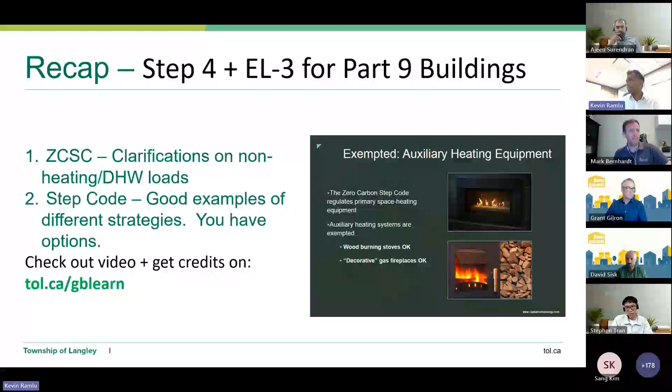So if this is something you really want to have, and your primary heating system can meet the demand, fill your boots, it's not included. It is not prohibited to have a fireplace. Cooking also - if you have a gas range and you're following the performance path of the Zero Carbon Step Code, go nuts, it's not included. It has nothing to do with Zero Carbon Step Code compliance, and barbecue connections also have nothing to do with compliance under the performance path.

We also learned in the last workshop that because step code is performance-based, you effectively have unlimited options to get to step 3, 4, and 5. One group showed us they had a step 3 building, and one way they got that all the way to step 4 and EL3. They had a step 3 EL1 building, and they took that all the way to step 4 EL3. They decided to.

do absolutely nothing to the step 3 EL1 building except change the windows. They changed these windows to triple glaze - certainly not run-of-the-mill windows, but they chose those. They changed them to triple glaze, and snap, that became a step 4 EL3 home. If that's not something you want to do, you have lots of options.

Talk to your energy advisor early on in the project, and you can find multiple ways to get to step 4 and 5. We have Mark Bernhardt here, who is a builder and past president of CHBA, and an active modeler and data analyst. He'll be able to tell you much more than Ajeen and I can on multiple options, so do take advantage of this time.

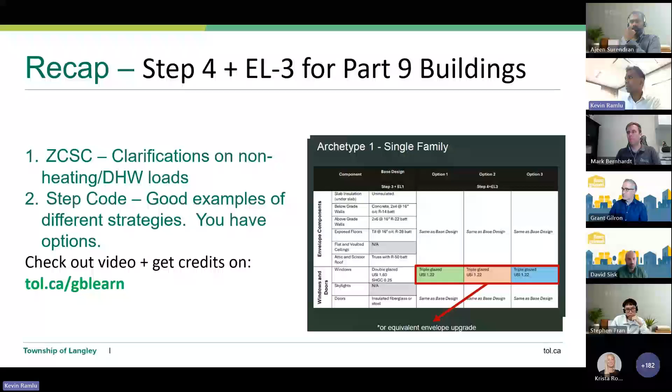Okay, this is important. Some compliance notes for all of you, particularly if you're building single family. Overheating in secondary suites is something you want to be aware of, especially if you're building a single family or starting with a single family building permit. Let's look at the sequencing. When you apply for a single family dwelling without a secondary suite, like an unfinished basement, and it's approved, you've demonstrated overheating compliance with the primary unit.

But after the building permit is issued, the client often says, I want to finish this basement into a secondary suite. That's pretty typical. You must acknowledge that through the code itself, you must demonstrate overheating compliance with every dwelling unit, and your secondary suite is a dwelling unit. So don't wait till the end to think about how you're going to meet this new regulation. Acknowledge when you are applying for that permit that you are responsible for your secondary suite permit, and that you are responsible to demonstrate compliance with overheating.

Do take a look at our bulletin. We were the first to release a bulletin on compliance, on how to comply with overheating protection. There is also some support from the Building Safety Standards Branch, and HVAC BC and TECA have a guide on complying with overheating protection.

Maybe some folks out there in the chat, how are you complying? Are you using central air conditioning, a heat pump or air conditioner? Are you using mini splits for localized cooling? Maybe you could give some tips to your colleagues on what you're doing.

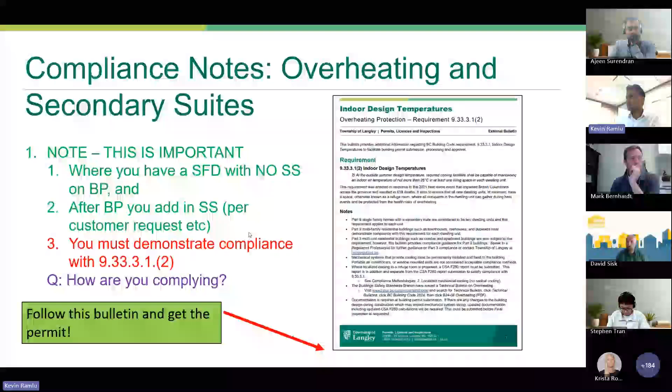Some minor updates. It's not going to really impact your lives too much, but it's important that you acknowledge that, and make sure that your HVAC folk or energy advisors are aware of this.

We have some updated forms. These are not new forms, I want to really highlight that. These are updated forms, and we have a form for heating, ventilation, and air conditioning system installation certification. The only change you need to know is in that red box.

This form has a variety of inputs, covering who's doing the work and what's going on there. We've also been asking, what is the heating capacity of your system? We want to know the heating capacity of your system so we can align it with your CSA F280 required calculations to make sure the sizing is aligned.

Now that overheating protection is a law through BC building code, we have a new box that asks what the cooling capacity is. All we need to do is compare that cooling capacity written here against your CSA F280 calculations, and we're good. It's just another input for your HVAC folk.

For our heating, ventilation, and air conditioning system design certification, it's the same document you've been doing for years. We've added a box certifying the cooling system. We did not have this because it was not required, but now we ask that it be certified that the cooling system has been designed in compliance with building code, gas directive, quality forced air guidelines, CSA or ASHRAE, etc., stating that the system has been designed through a recognized standard.

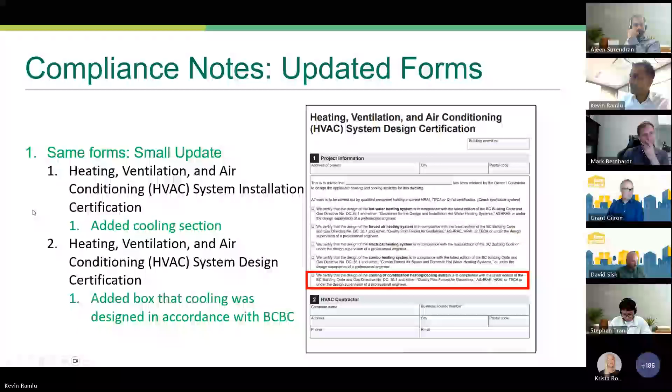We've had rebates. The Township of Langley is one of the very few municipalities that offer rebates and financial support to help us get to step code, meet step code, and expand our skills.

We've had a mid-construction blower door test rebate for a very long time. We don't get a lot of uptake, though we do see it from big developers who want to push the needle and get ahead of the game. But it's really important, especially for everybody operating in Langley, since we are at step 4. If you're new to step 4, a new builder, and new to air tightness, you might be a little bit worried.

I strongly recommend you inquire about our mid-construction blower door test rebate. We offer up to $350 for mid-construction blower door testing. You want to do this once framing's up and right before drywall. This test will help you identify problems before the drywall's up.

Once your drywall's up, it's a much bigger task to become airtight, particularly now that we're at step 4, and other municipalities too, with everyone at step 5 by 2032. Doing this at mid-construction helps you learn ahead of time, so before your final blower door test, if you're failing, that can be very costly and time consuming to remedy. When you test at mid-construction, you have time to fix things, and we offer a sizable rebate to help you learn what mistakes you're making and address them, until eventually you can wean yourself off the rebate and won't need it.

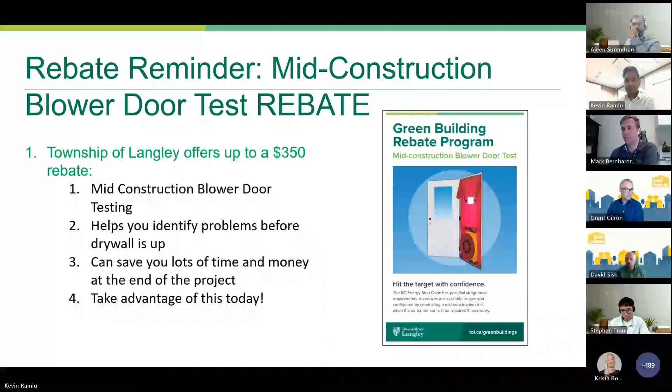Here at the township and Green Buildings, we do a ton of data analysis from your BPs, from the data we get, to understand what's going on in the building community, to help us better understand what's working, what's not working, where our builders need a little more help or where they're excelling. I wanted to highlight something in particular on air tightness.

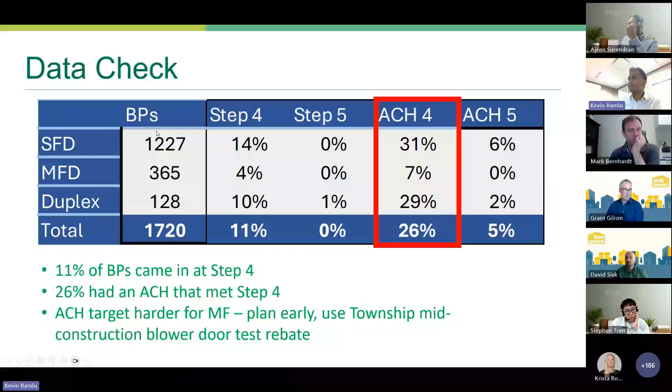On the legend here, the y-axis: SFD means single family dwelling, so a regular house. MFD is multifamily, so townhouse or row house, and that is a duplex. We've had many building permits since 2021, and I want to highlight something around air changes. All of this data, effectively 99.9% of it, is step 3 buildings that were required to meet step 3.

For single-family dwellings designed, constructed, and required to meet step 3, 31% came in meeting step 4 for air changes, with an air change rate of 1.5. So nearly a third of builders were either just landing at an air change of 1.5, or they were talking to their trades, coordinating design early in the project, or had an air boss watching trades and staff to ensure they weren't puncturing the air barrier. Nearly a third just landed at the air change requirement for step 4.

That's very interesting data. However, I want to point your attention to multifamily, where only 7% accidentally met that requirement. So what that tells us is if you're building multifamily, townhouse, or row house, you want to talk to your trades and have more discussions about how to meet those higher, or smaller, air change rates for step 4 and 5.

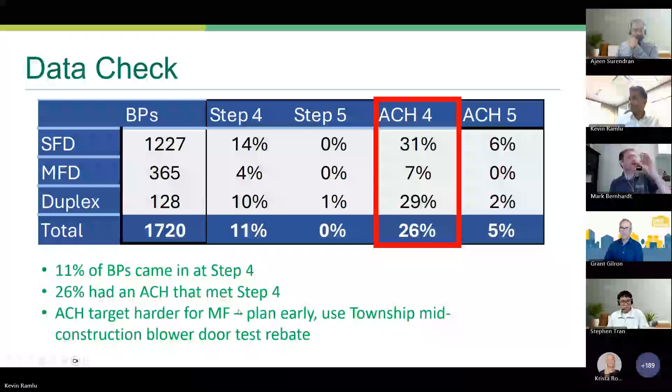For those of you who've missed any of our lectures or workshops over the last 5 years, check out our website, our brand new-ish Green Buildings On Demand platform. It's an on-demand learning portal. You can watch any workshop we've had over the last 5 years at any time of day, anywhere in the world, I suppose. And if you finish the course, you'll get a certificate fully accredited by BC Housing, Building Officials Association BC, Canadian Certified Energy Advisors Association, and more.

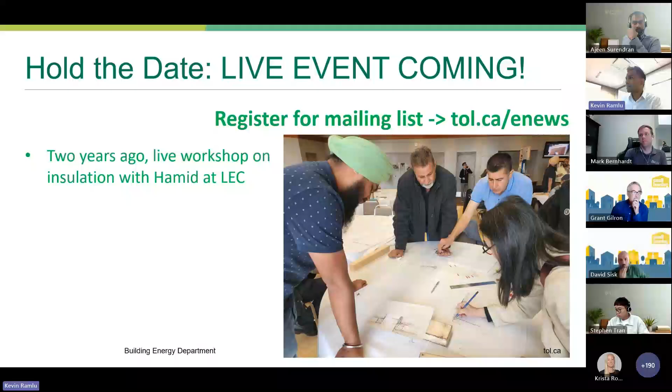And this year we're back. You're the first to know here. And we're partnering with the City of Maple Ridge. We want to make this a real slam dunk and a really big event. So we partnered with our friends at Maple Ridge to join forces and put on a really awesome workshop for you all.

So here's something you want to jot down: October 21st and 22nd of this year, you want to hold the date. You're the first to know. Hold the date for somebody from your building group or your company. We're having this event held over 2 days, one event each day. It's not a 2-day event, so to speak - it's 2 of the same day to ensure that we can capture many people.

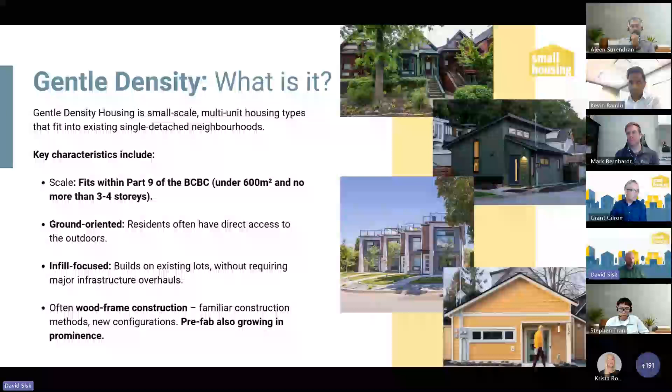This slide gives an example of the kinds of homes we're talking about, all falling under the gentle density definition. You have laneway homes or garden suites, which are small self-contained homes built in the backyard or laneway of an existing property, often used for additional rental income or housing an extended family.

Pocket neighborhoods are clusters of small homes arranged around a shared green space or courtyard, designed to foster community connection. Similarly, you have co-housing models, a group of private homes with shared common spaces like kitchens, gardens, or play areas—very community driven and increasing in popularity. Often with small housing we see groups of friends pooling resources to set these up.

Houseplexes or multiplexes are emerging across the province on foot of Bill 44, which I'll touch on shortly. This is typically a single building designed to look like a large house from the street, but containing multiple separate homes within—duplexes, triplexes, or fourplexes.

Lock-off suites, typically not as common as the others in the gentle density space, are flexible, self-contained secondary units within a larger home that can be locked off for independent use of tenants.

Then you have small lot homes, which are compact, detached houses built on smaller than standard lots, making super efficient use of the land. Row homes or townhouses are increasingly popular across BC—series of attached homes that share sidewalls and are individually owned, typically with private entrances and small yards. And finally, secondary suites: self-contained apartments within an existing home, such as a basement or above-garage unit with its own kitchen, bathroom, and entrance.

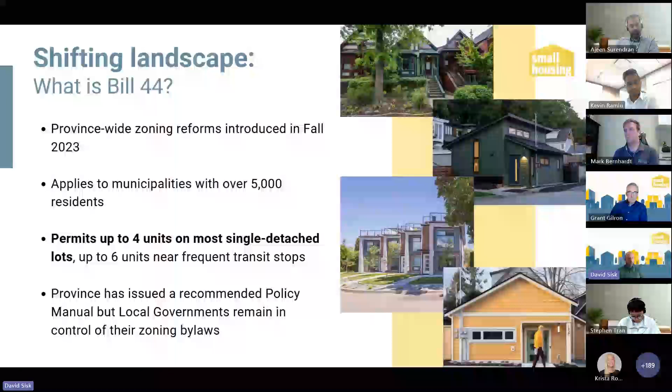Cool, so now we get on to some of the fun stuff, some of the research that we've conducted that I think would be of interest to folks on the call. Support for gentle density is stronger than you might expect, and it's coming from all sides. We recently conducted research with Leger polling. We polled over 1,000 people across British Columbia, right across the province, and we found that over 80% of them said they support gentle density as a housing solution.

And what we've always said with builders is that it's important to recognize that. So when you're building gentle density, you're actually not pushing against public opinion, which sometimes is the narrative that emerges due to a bit of a vocal minority that you might see in the media or in politics. Our research shows that this is actually the kind of homes that people are wanting and needing, and it comes right across the divide.

A lot of people we deal with that are looking for these types of homes might be seniors and aging parents that are looking to downsize but don't want to leave the neighborhoods they know, and they're close to their families and friends that they rely on.

Others might be young families, first-time buyers who are just searching for homes they can actually afford, which again are close to the existing amenities that are already in existence.

Gentle density opens up these opportunities a lot more than what's currently available on the market, just traditional single-family lots.

Essential frontline workers are another big audience in this. Homeowners planning for the future are also exploring gentle density as a way to add value to their property, welcome extended family members onto their lot while still keeping the independence, and also just to generate additional revenue.

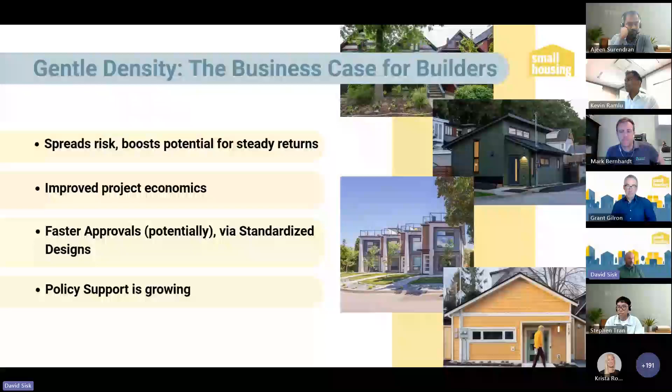So at a glance, the fourplex has a higher build cost than the single family home. But if you dig into the details, you'll see that the fourplex produces a gross profit of about $500,000 compared to just $240,000 for the single detached home. So both projects yield a profit margin of 21%.

So while both have the same profit margin, this is with each unit of the fourplex priced at $575,000, which is well below the current average price for a fourplex unit in BC. So from a builder's perspective, this should excite you. It shows that the profit potential can be even higher.

If those same units were sold at say $750,000 each, which is much more aligned with today's market, the gross profit would jump to 1.2 million potentially, all while staying on the same single family lot. We like to think of it as a reminder that smart builders don't just look at build costs, they focus on the whole project, the total site return, and how many doors that lot can support.

Some of these savings are driven by efficiency. Shared walls mean lower exterior material costs and faster build timelines. Shared infrastructure can create real savings per unit. And when you're pricing well-built homes at a more attainable level than the single-family market, you're tapping into a much broader pool of buyers and renters, which means faster sales or lease-up and lower holding risk.

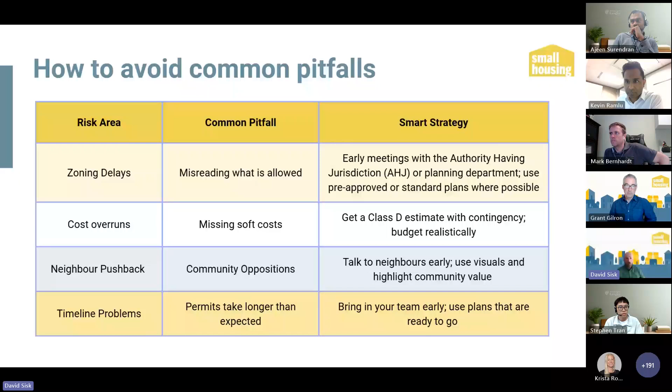So, penultimate slide before I pass over to my colleague Grant, who will talk about some upcoming stuff we're working on. If I was to summarize and give you guys, the builders on the call today, the three key takeaways...

I'd again echo that gentle density is a major opportunity for small scale builders. You have the skills, the tools, and local knowledge needed to deliver gentle density housing, using familiar construction methods, and it all fits within Part 9 of the BC Building Code. These projects are highly viable because big developers are not competing in this space, leaving room for smaller, agile builders to lead.

Secondly, we are seeing strong policy and market forces driving this demand. Bill 44 has unlocked new rights on single-family lots across BC, signaling strong government support for gentle density projects. Public support is high - over 80% of British Columbians backing this. This combination of policy changes and market interest creates a significant pipeline of projects ready to be delivered.

And finally, the financial business case is compelling. We've only had a short time to speak to it today - we can go into more detail with some of the other resources we offer at Small Housing. But as I said, gentle density can spread the risk, improve profitability, and overall better utilize the land.

Multi-unit projects on single lots deliver more homes, lower per-unit costs, and access to a broader buyer-renter pool. Builders can benefit from streamlined permitting potentially, new incentives, and updated rules like phased DCC payments, and other emerging policies like strata titling of laneway homes, which we can talk about in the Q&A. All of this is improving project economics and making these developments more attractive. So all in all, there's huge potential here for an advantage for first movers, and these costs will only likely go down if we can build some momentum.

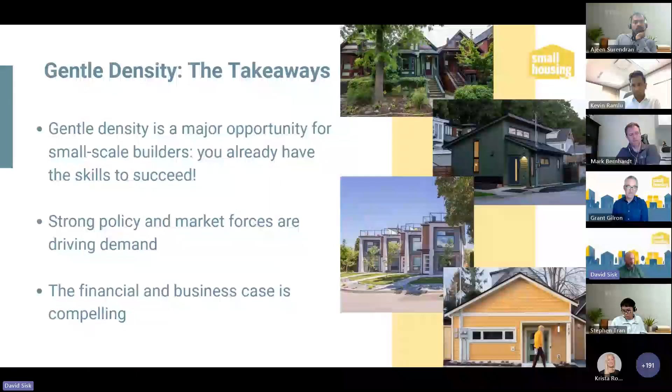So with that, I'll pass it over to Grant to talk about some upcoming training sessions we've got going on. Thanks, David - that was a great overview of everything.

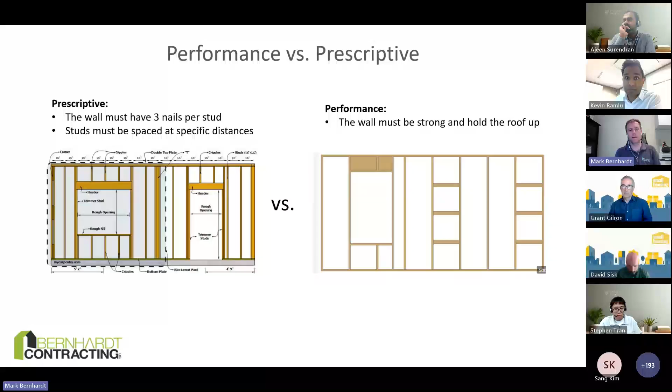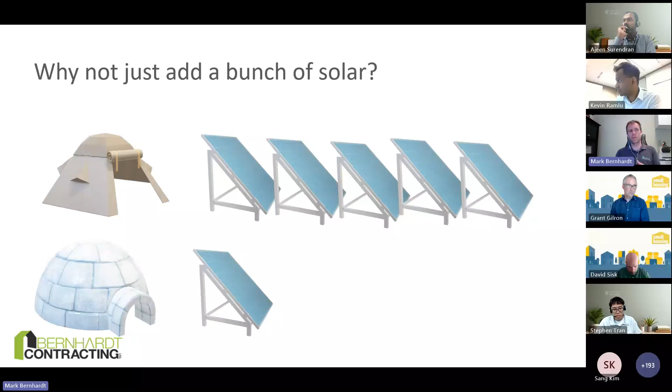So if our goal is to be environmental, or deal with climate change, why not just add a bunch of solar panels to a house? Well, the main reason is that doesn't deal with a lot of the core issues we face with climate change and resiliency in housing — a tent could be net zero if it had enough solar panels. But take a well-designed house, something like an igloo, and now you only need one or two solar panels. It doesn't deal with the peak load issue.

For us to deal with this problem as a society, we need to deal with our peak load. BC Hydro has a ton of power — lots of it. Yes, they import some, but because they buy it cheap and sell it back to places like California at double the price. It's good business and one reason our power rates are so low. We're not running out of power, there's lots there. But going forward, it's a lot easier for our society to supply power if we deal with our peak load issue — and that issue is the operation of your house.

You're going up and down throughout the day with loads, and we hit a cold snap and we're going to peak way up, or we hit a heat wave and it's going to peak way up in our energy use. A high performance house will have a much lower peak. And that's the reason why our codes are focused on an envelope first approach, right? We want to insulate the house, we want to design it well, so that our peak loads are dropping. And that makes everything else much more practical.

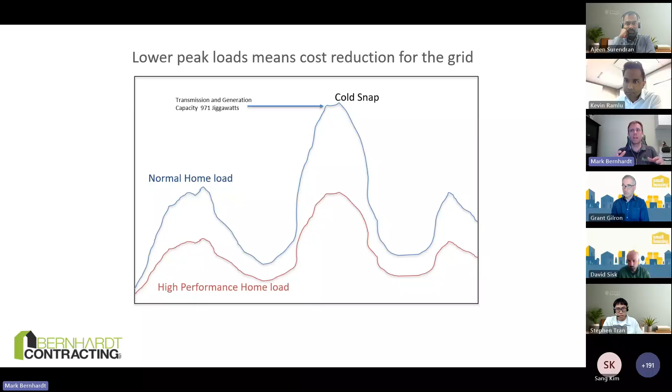All the electrification, all that sort of stuff, right? And you can imagine if we had a peak load that looked like this, right? We have to transmit and generate that 971 gigawatts versus only 371 gigawatts, right? Like it's a vast difference in how we move power around the province.

So back to the step code now, and now that we know kind of why we're doing it and such. The process of it, for those that maybe new to the industry have never done it before, basically what's going to happen, in the real quick Coles Notes here, is the builder's going to send a set of plans to the energy advisor. The energy advisor is going to do an energy model on that, just a bunch of math. The energy advisor is going to give you back a permit form. It's a standard provincial permit form. That's going to go to the city with your permit package, and hopefully everything's all good there.

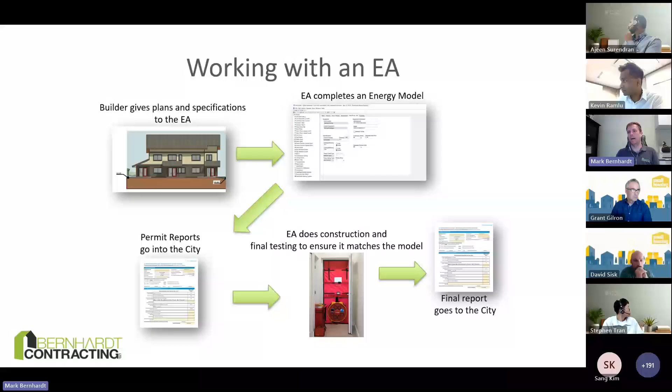Sometime mid-construction, ideally, you're going to bring that energy advisor back to do a mid-construction test, usually before drywall goes on, to make sure that you're going to hit the targets. Now, that test isn't required, just a really good idea, because it's a lot easier to fix things at that stage than it is at final. At final, that energy advisor is going to come and do the official test and give you a report, hopefully saying you passed and it's all good to go.

That report, here's an example of one. Is something that builders really want to be paying attention to. This is just the first 2 pages. The third page is really for the city, so builders need to pay attention to the first two. First of all, page number 1 has all the information on it that you're looking at the right project. Page number 2 is really important for those builders because it shows what I've energy modeled your house at.

So things like windows, for example, what is the U value of that window? What is the solar heat gain of that window? You should be giving this form to your trades and to your suppliers. Like, your window supplier needs to know what we've energy modeled. And so really important information for all the trades. And it's important that that match what you're intending to build, because if you're intending to build something less than what is shown on this form, you're in trouble. Could end up failing. And we've had that happen before, and it's expensive.

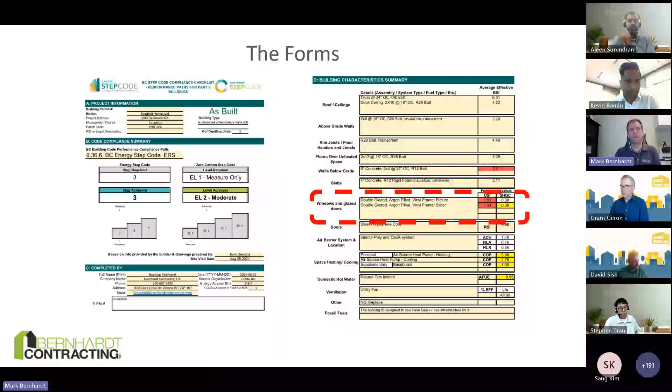The code itself, there are 3 main categories of the code here that we have to hit. And I'm not going to get into the nitty-gritty of the numbers here. That's for your energy advisor to work out. But what we need to know is that there are 3 main categories that we have to hit. First is the air leakage.

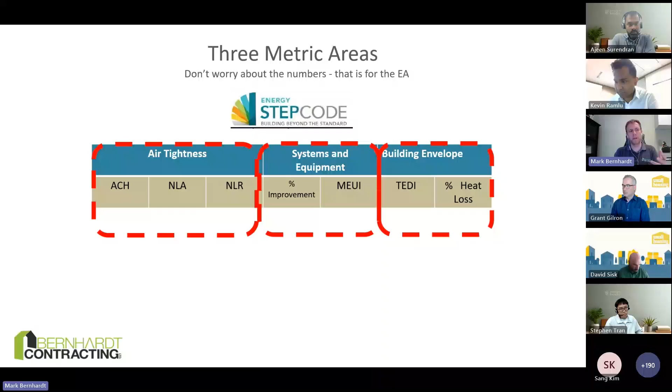We've talked about that a bit already today. Mechanical systems and equipment, this is really total energy. If you work in the Part 3 world, they do call it total energy. We eliminate base loads in Part 9, so it's not quite total energy, but if you think about it that way, that's fine. That's sort of the same idea. And the TEDI. The TEDI is basically how hard your furnace has to work to keep this house warm. So we have to hit each of those, something in each of those categories to make this work.

And that then brings us to whatever step code level. It's companion code, right? Now we've brought the energy load of the building down, and now all the electrification stuff becomes practical, or the decarbonizing of our energy becomes practical. So it has a companion code, the 'zero' carbon step code, and I've got that zero in quotes there because it's actually not zero. That's just greenwashing, and there's no real such thing as zero.

But this also has 3 categories to choose from, right? It's a total GHG per year, it's a GHG per meter squared with a max cap, and a prescriptive option, which is silly and nobody should do. But the 2 other options, one favors large houses and one favors small houses. So it sort of covers the range of what we'd want to do there. The unfortunate thing with this code is it is getting a lot of bad press, and particularly a lot of bad misinformation right now.

And we're seeing that having an effect at council chambers, where people are coming and doing a lot of protesting.

It's really unfortunate, because this code and the energy code was actually designed by builders, for builders, to achieve this resiliency goal. It's not just something the government cooked up. It's actually designed by industry with a lot of input. And for that reason, it's actually not particularly difficult to hit, but it does still achieve the goal.

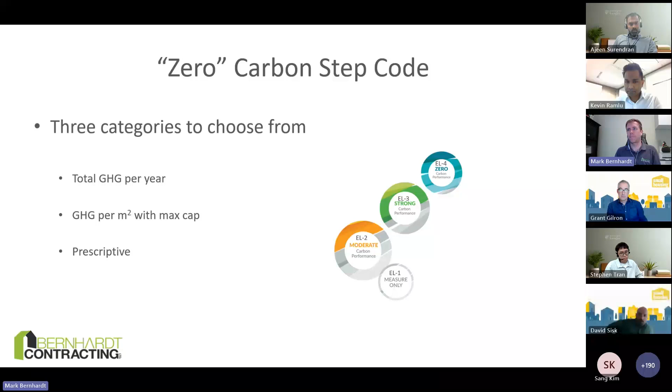The reason I think we're getting a lot of pushback is because the brochure says this. This is the prescriptive pathway. It says, well, you're going to start by decarbonizing your heating system - okay, maybe that's not a big deal. Then you're going to decarbonize your heating and your hot water. And then we're going to decarbonize all systems. And what they mean by all systems is basically none of them. So I can see how that might be confusing to folks, and this is really what I think has generated a lot of pushback.

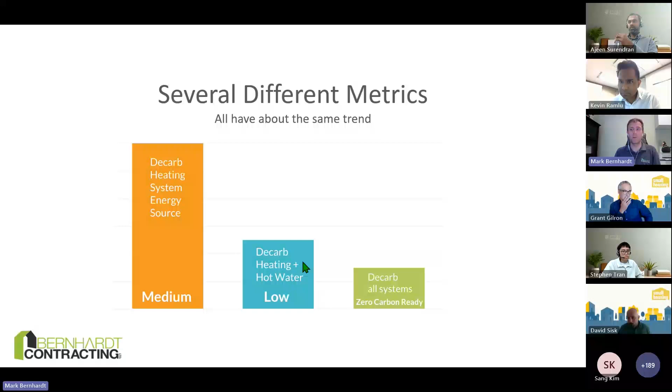So let's look at a house - what is included and what is not. Kevin already alluded to this, but let's do a bit more detail. We're going to count, if we're looking at GHG emissions, your principal heating system - that's the main thing that heats the house. So if that's a gas furnace, that's going to have a lot of emissions associated with it. Heat pump, not so much.

We're going to count a supplementary heating system. This is a heating system designed to come on and help the main system out if it can't keep up or do the entire energy load. We're counting that because if you've got a situation, as in Langley, where you've got a heat pump with a gas furnace as a supplementary system, even the worst heat pump you can buy these days is going to be doing the vast majority of the heating, unless it's set or installed wrong. So on my energy model, I'm going to use this much more efficient system, and only turn on that less efficient one in very extreme circumstances.

And so there's going to be hardly any GHGs associated with that. The hot water tank is counted, and this is probably the biggest change we're seeing in industry - going from a lot of people using a gas boiler to an electric tank. In my experience, that's vastly cheaper, so not necessarily a problem. If you have somebody with a high hot water load, get them two tanks and it's still cheaper. In small housing, that gets to be a space issue, but there are lots of relatively easy solutions there as well.

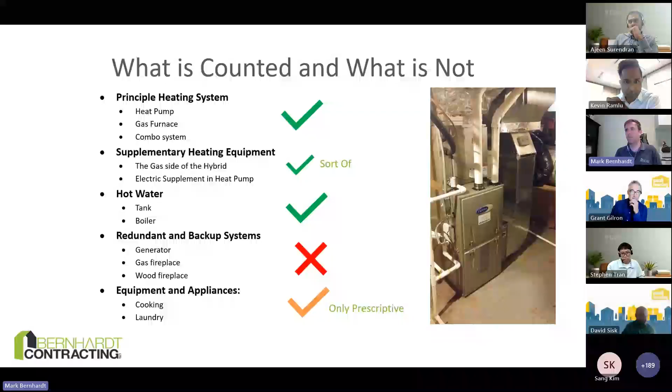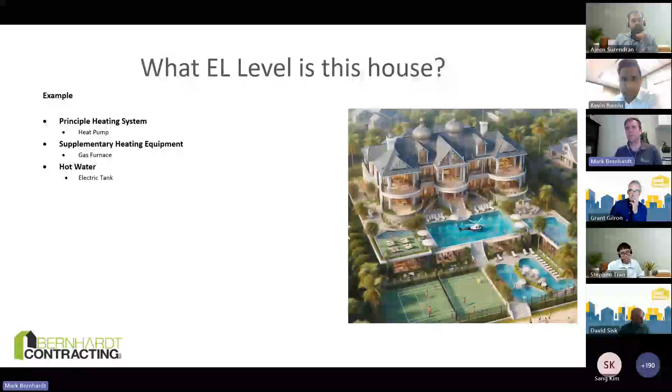Let's look at an example house here - an average Langley house, pretty typical of what you might see down the block. I'm not sure why they're landing their helicopter in the pool, but whatever. And obviously there's been a few years of climate change going on here with the palm trees. But this house has a heat pump as the main system, starting off pretty good there, with gas supplementary heating - I don't know why they'd want that in Langley, but it's there, that's fine, they can do that. Electric hot water - a house this size, we're probably going to have a few different tanks, but also acceptable for this code. We have some redundant and backup systems - we've got a diesel generator, got to keep the game on when the power goes out.

Got a gas fireplace in every room, including the walk-in closet, because only a peasant would change in a room that doesn't have a fireplace. So obviously, we do have some gas cooking, some gas laundry. Other systems, we've got a gas heated driveway, gas barbecue, gas heated pool, patio heaters, heated garage, tiki torches, and a sauna. All running on gas.

Now, you could take a moment to think to yourself, what level of the carbon step code would this be? And if you said top level, best you can do, you'd be correct. This is an EL4 house, even with all that gas usage.

So if you hear anybody talking about gas ban, wrong. And now we've heard this from both sides of the debate too, right? You got your average tree hugger activist type saying we should ban gas, and this is a gas ban, we want it. And you've got the people on the other side saying we don't want the gas ban, you can't ban gas. Neither of them are correct.

It's actually kind of somewhere in the middle. And for my friends in the tree hugger Greenpeace type community, you can feel good that we're taking care of the biggest loads, right? Baby steps will get there eventually. For those of you builders out there that don't want to fight with your client about cooking, you can feel good, you're okay, you've got it. And the tiki torches and whatever, all that's not counted, so we're not even looking at that. So this house with the helicopter and the pool is an EL4 house.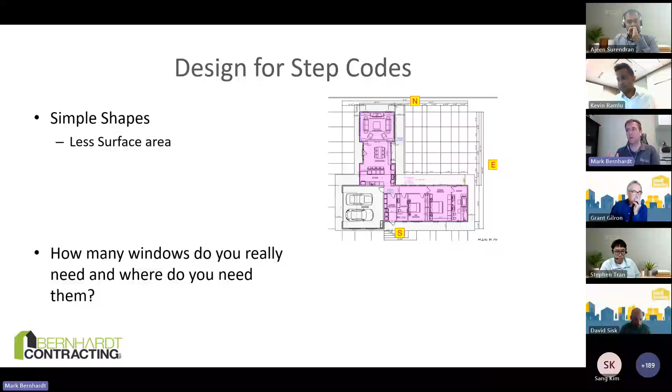This is an example of somebody who spent a lot more money than they needed to, and they could have easily changed their design. The second key piece is: think about how many windows do you actually need and where do you need them? Here's an example, again, from a recent one of our files here. This house, we might call a solar cooker as well, because this is the south side we're looking at here. It's got way too many windows on the south side. This is going to be a very, very hot house.

Now, they might have a view and they might tell me to go away and we're just going to air condition this, which I guess you can do. But again, we've got a bit of an eccentric shape here in the house where you can see different wings poking off there, single level, so very high surface area combined with a ridiculous amount of windows facing in directions that are not helpful, and very high cooling load on this house. Designs like this are just not going to give you an affordable design.

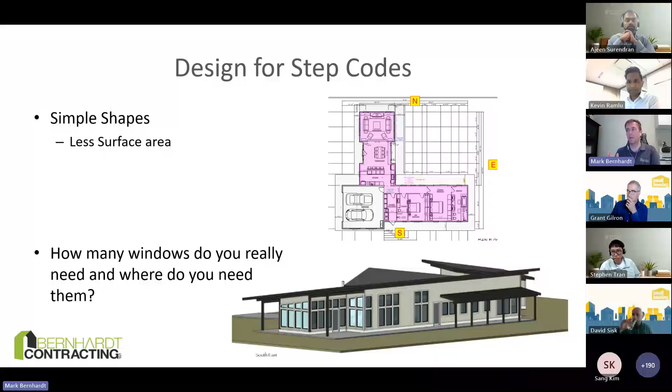I'm going to contrast that to this house here. Now, admittedly, this one is not going to win any design competitions, but you change the siding up, you throw a deck on the front, maybe you could spruce this thing up pretty well, and it would be quite an attractive house. This house was actually built in the Qualicum area, and it's a much simpler shape, right? It does have some corners, it's not a full box, but it's a much simpler shape. And this house with very, very cheap construction, like the worst you're legally allowed to do, kind of a little bit below respectable, is step 4, without breaking a sweat. So this house does have a legal secondary suite in it.

So it is a missing middle type of housing that we're looking at the floor plan of the upper floor here and the suites on the lower floor. So, effectively a duplex kind of situation.

Step 4 with the worst construction any respectable builder could think they would do. With just adding R22 in the walls and meeting the air leakage requirement, this house is step 5. So that's still really crummy windows, still basically standard insulation everywhere. This house is step 5 with just slightly better walls and air tightness. That's it. This is a very cheap house to get to step 5.

Incidentally, this house was also designed not to need a structural engineer. It's done under the new seismic codes where we can do the lateral load calculations. So right there, we've saved an engineer and we can get to step 5 with hardly spending any money at all.

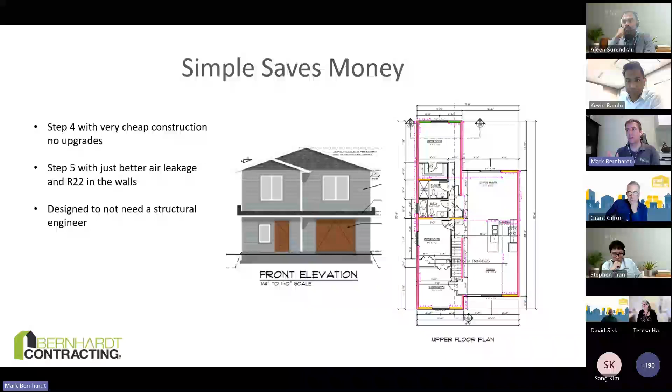How did they do it? Well, this is a builder that we've worked with for quite a while, and they do it through integrated design. Integrated design has been a key part of our own development company's process for a long time.

We did it mostly because we knew we didn't know what we were doing and we had to go ask for expertise. Then that expertise would talk to us in all sorts of fancy language that we didn't understand. So we'd have to get everybody that knew that language in the same room to hear that. What we were doing is collecting people into the same room to talk to each other.

That's integrated design. So what we're doing is inviting our trades early in with the designer for pre-project meetings. What is the goal? What are we trying to achieve? The plumber is going to say, avoid doing this because we had this problem down the street, or whatever. We're going to have that discussion.

We're getting their opinions, not just their prices, right? Typically we hire people that we think are qualified, and if we think they're qualified, we respect their opinion. I'm not going out to lowest tender and hiring whatever Yahoo, people who give me all sorts of funny advice. We hire them because they're good, and that saves us piles and piles of money in the end product.

It doesn't need to be a formal or fancy process, right? Most of the time we do this, it's just a meeting we're getting together, often online. We did one in Invermere not long ago with 10 retrofits, and our goal was to get through all 10 retrofits in a morning. It was one builder doing all these 10 retrofits. We had the electrician, the HVAC person, the plumber there, and the builder, and us as energy advisor.

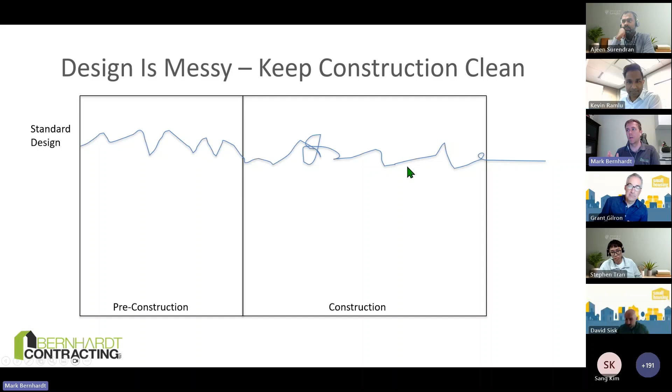And this is really what we're trying to do, right? If we have a standard design process, you're a little bit messy up at the start, and then you get into construction and you have one change, and you're kind of all over the place with the construction, making changes and doing weird things. Inevitably, your timeline goes a little longer than maybe it should, versus an integrated design project where all of our messiness stays in pre-construction, and after that it's very smooth.

This is typically how our projects look when we build them. We build our developments with 0 change orders as the goal. We want 0 changes in construction. I want everything, including the grout color, picked before I put a shovel in the ground. And then I just want to push play and it all rolls out. So much easier for us.

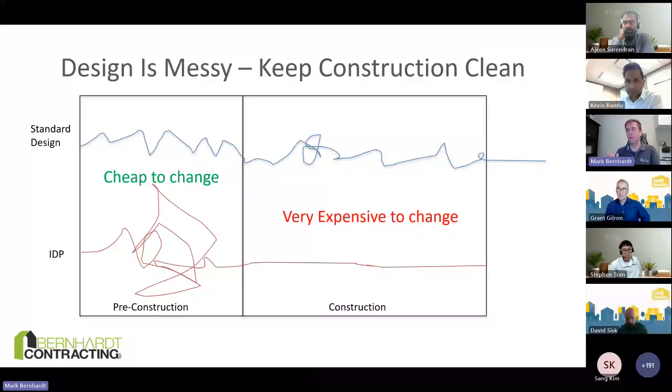And the key here, the reason we're not spending a ton of extra money to do this, is because changes in construction are exceptionally expensive. Changes in design are very cheap.

So how does this integrate with step code? Well, we get simple details like this if we're integrating our design early on, right? Things like party walls, particularly in the missing middle world, they tend to be a problem.

We need simple details that all the trades know and understand. And these aren't architectural details - these are ones that I've sketched out and drawn and handed to a trade and said, what about this? And they said, yeah, we can totally build that. And then we achieve a high level of airtightness.

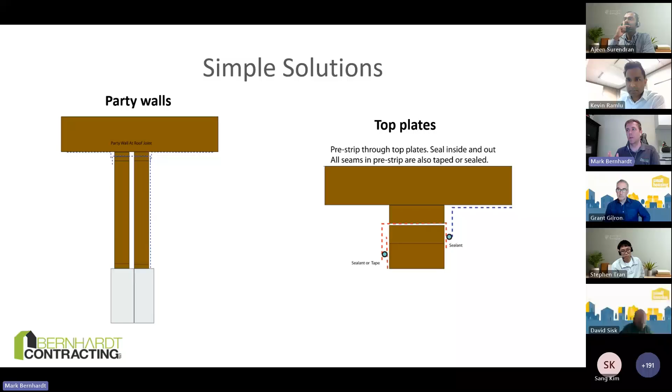Or you're going to send some poor first-year apprentice carpenter around there with bags of caulking, and they're going to hate their life, and it's still not going to work. So what we're recommending is Tyvek the inside of your garage. It's an exterior wall - treat it like one, and use an exterior air barrier just inside the garage. Now we've avoided all that plumbing, all that sort of stuff. Makes it way easier. And then on the party walls, we want to see a transition through.

It's 2 separate walls, but they need to connect too. The air barrier must be continuous in order to work. And you can't have continuous if you've got 2 pieces of poly over 2 party walls. It's got to go through.

And so our supervision is what takes care of this. We make sure that our framers understand that they're going to pre-strip and where they're going to pre-strip, and then it becomes a simple, easy detail. I think these are probably the two main reasons why Kevin's data shows that multifamily housing has poor airtightness rates relative to single family. I think if I had to point to two things, it would probably be this.

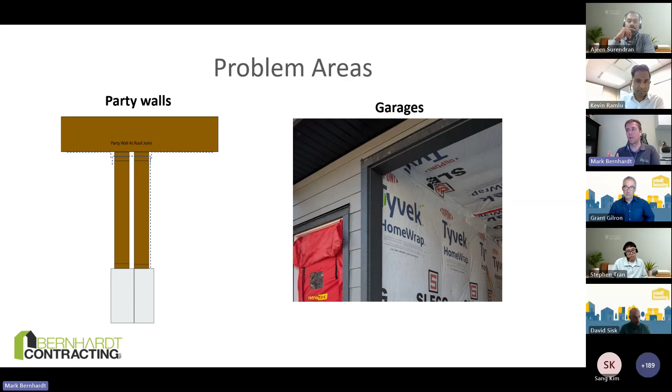We see also things like this. Another reason to integrate your team is to bring your trades in, so they understand what you're trying to do and what the goal of the notes on the plans mean. So this is pre-stripping gone wrong here - the framer knew they were supposed to pre-strip, but not why, and so they've left all kinds of gaps.

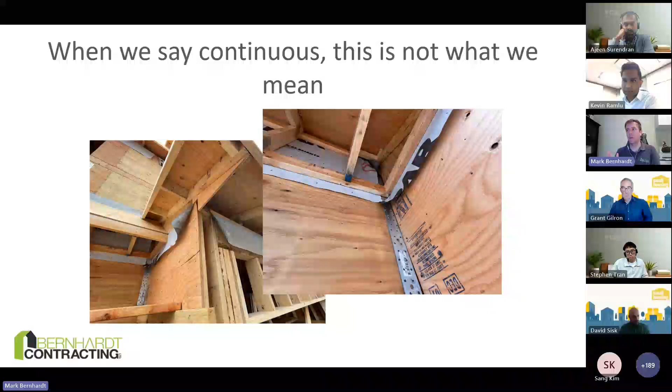This particular townhouse failed miserably. We retested it like 5 times, and they ended up having to do AeroBarrier, which still failed because their gaps were too big. It was just a lot of rework, wasted a ton of money, just because a trade didn't understand what they were trying to do, and the site supervisor never left the trailer. So if your site supervisor doesn't leave their trailer, hire a new site supervisor.

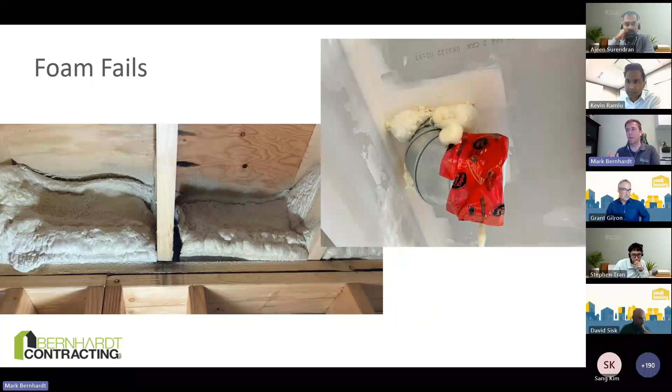The other problems we see are things like this - inappropriate material choices. Spray foam in particular is a real sore point for me because we see so many fails in spray foam, just coming off the wood. It's just not an appropriate air barrier. You don't need the spray foam. Go to an exterior air barrier, and then we can put a cheap fiberglass batt in that location, and job is done. No need for this, and we get a lot easier results out of it.

Simple solutions like this came out of some integrated design sessions. This is a townhouse in Tsawwassen, right near Tsawwassen Mills there, an affordable housing complex. And these are the data cables that come out through the wall. So obviously the electrician didn't get the memo and just drilled through the air barrier willy-nilly.

But the solution was to take a piece of pond liner, cut some small holes in it, and shove all these pipes through. Worked great - simple, easy, probably maybe $5 worth of material sitting there. And the even better part is now that electrician can yank on those tubes and not spoil the air barrier. So I really like solutions like this because they're adjustable and flexible, and they work really well.

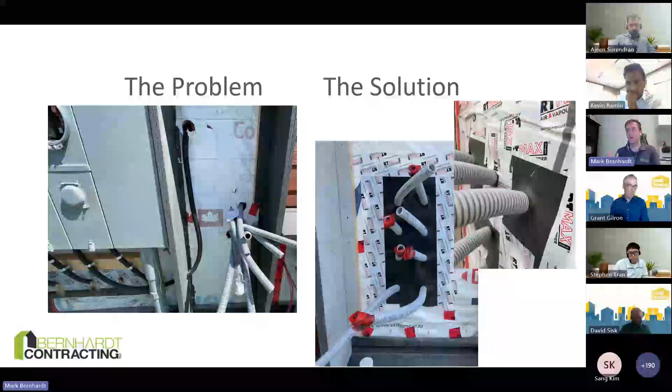And this particular development did end up getting step 4. And if we look across the province to where we're at, we know we have a timeline - the province has said we're going to get to step 4 in 2027.

How are we doing? Well, here's year over year. This is the entire province's worth of data here. Now, there's not a ton of data in 2025 because this data pull was done in February, so we don't have a ton of houses there, so they're a little skewed.

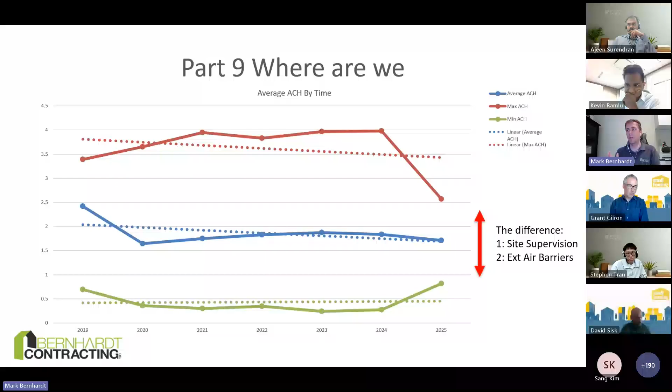But you can sort of see the trend there. The difference I want to highlight between the worst and best results in this data set is, number one, site supervision. Cell phone contractor types not doing well. Contractors that are on site paying attention or have good site supers or good lead carpenters. We've even seen where it's a first-year apprentice, but that apprentice is instructed to pay attention and let us know if anything goes wrong in this area.

We are teaching air tightness in carpentry schools now, and have been for a number of years. BCIT does it, VIU does it, all the carpentry schools do it. So these people coming out of these programs should know and can tell you when things are going wrong. The second difference is exterior air barriers. We're not doing the poly and caulk as our air barrier. Some places still do have poly and caulk, but that's not the primary air barrier. Those are the two key differences between the worst and the best.

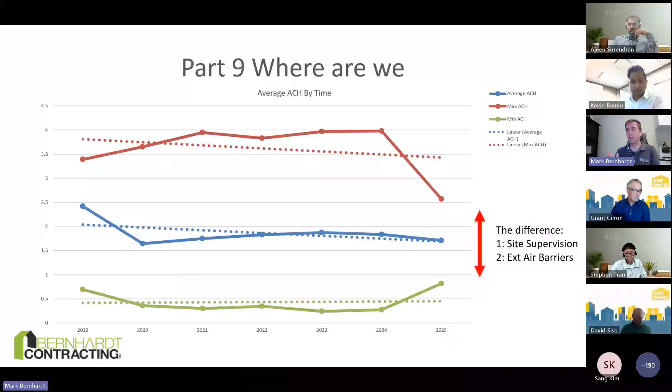And trending this out to 2027, when the step 4 requirement is supposed to be provincially mandated -- don't hold me to that, subject to political interference, timelines shift around, but that's the official timeline -- we are actually on track for the average builder to meet step 4. It's a steady downtick as people practice or figure this out.

And I really like that idea that it's not actually space age materials. We're not going out and buying really expensive tapes and stuff, although I kind of like that stuff. It's just good site practice. That's really the only change to get us up to these higher levels of air tightness.

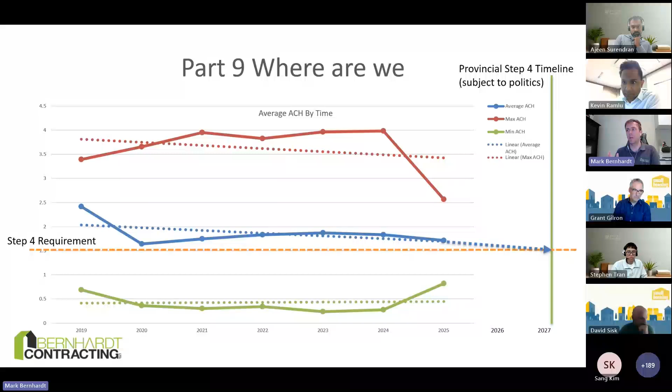And looking at Fraser Valley, so this includes a little bit more than the Langley area in our database here, but it's sort of that Fraser Valley region, we have 1,449 homes in that database that met step 3.

Interesting fun fact about these homes is that if they got better air leakage -- if we moved them all to at least 1.5 ACH, which would be step 4 -- 468 of them would move up a step. So the only upgrade that basically a third of these houses need to move up one step is air tightness.

That's it. So if we can get good site supervision and change to an exterior air barrier, which is arguably way easier than doing an interior one, often cheaper, we can get to step 4 for most of these houses, at least for a third of them anyway. And the others, I'd be willing to bet it's a relatively simple design change to get us there. So we can get there without spending any real money. And I think that's a real win.

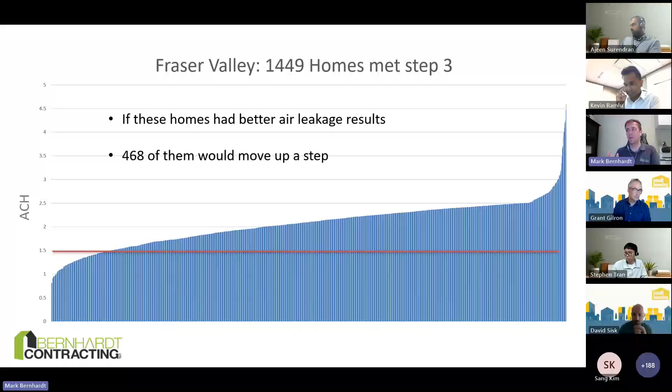And that is actually the way the code was designed as well. Like I said before, it was designed by builders, kind of for builders. So this idea that you can design for it rather than spend money for it is really one of the underpinning ideas of how those metrics are designed.

So moving on to mechanical systems now, because this has been a bit of a struggle for particularly small spaces. My own house is an example here, a house with a legal secondary suite. When we built it, because the energy load is so low, we actually couldn't get a heat pump small enough to serve this house. We now do have one because they became available and we had pre-plumbed for it, so it was relatively easy to install. But there are lots of examples where the heat pumps available used to not be small enough to do the thing. Good news is there are now some really good options entering the market.

And we're seeing a lot of these efficient small scale heat pump / HRV units. They're real compact size, both in their physical size and their capacity. So they're not big, not the 40,000 BTU jumbo things, and their physical size is very small as well. These take care of ventilation, heating, and cooling -- an all-in-one kind of unit. For these small spaces, we're seeing this market really take off because it's such a slick solution.

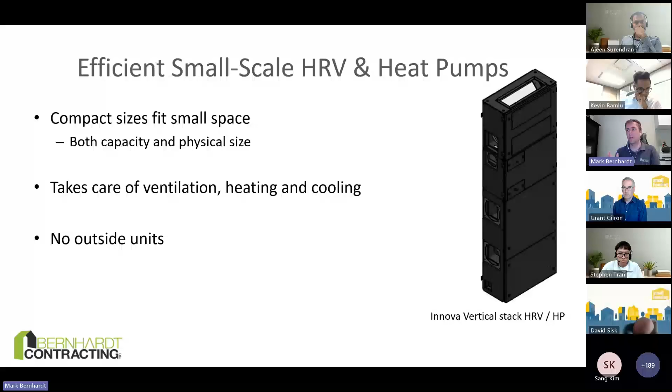So looking at some of the options available on the market today, we've had projects use all of these options now.

The Innova makes a little heat pump. It's a through-the-wall heat pump, just has two 6-inch holes in the wall. Now this is a heat pump only, it doesn't do ventilation as well. But for a small space, we've met the cooling requirement and taken a good portion of our heating load. Certainly in the Langley area, it's probably going to take all of the heating load. As we get colder, maybe up the mountains a bit, these units max out at -10, so they're not going to be 100% of your heating load in some areas, but for the lower mainland, they do a fair bit of it.

The other unit, this is the one that's integrated here, another Innova unit. They call it the vertical stack, but it can also go horizontal on the roof. This is something you'd put in a small bulkhead, maybe in the roof of a bathroom or a closet. HRV and heat pump all built in, no outside unit at all.

Minotair has a very similar unit, and one of the projects we worked on in Tofino had one of these, and it was really nice. They just put it in the roof of a closet, fit in there seamlessly, and works really well. Tofino is a much harsher environment than what you'd see in Langley in terms of bad weather and such, and it works great. Provides 100% of the load for the house as well as the ventilation.

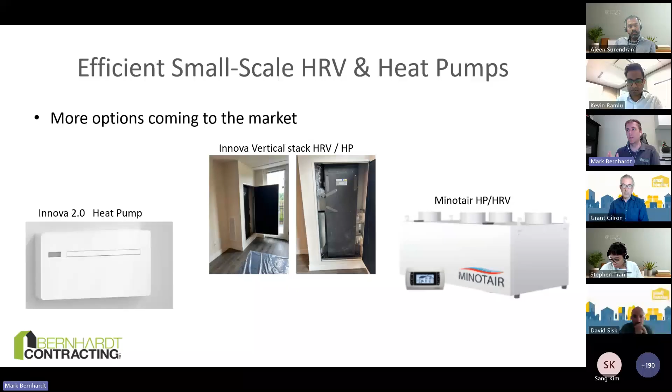To put that into practice, here's a garden suite, very simple, very cheap build sort of deal. You could imagine this as a townhouse or maybe a small multi-unit residential if you stacked these units up. I'm just using a townhouse example here, but this could be any different configuration.

If we did an all-in-one unit, we might locate it in the roof of the closet. So we shorten the closet by maybe 12 inches, maybe a little more - still plenty of room, no big deal. And then we vent out to the room.

So we've got hardly any ducting in this house. Probably we might vent, with a little bulkhead across to the bathrooms and get the bathrooms with this as well. But you don't have to.

Maybe it was easier to put an electric baseboard in there, or maybe we've got heated tile and don't need the heat, and we're just using conventional bathroom fans for ventilation. Really good options, easy to locate, short ducting. So we're not paying for all sorts of drywall work with the bulkheads, or for long ducting runs and all that kind of stuff. Very, very easy to do.

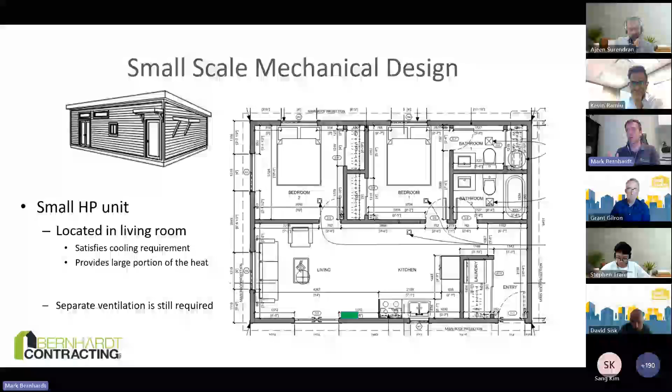If we're looking at that small through-the-wall type of heat pump, which there are a few different brands of, we might put just one single unit in the living room, just off to the side there. They're very compact, only stick out about 6 inches, very easy to install. They only require 15 amps of power, so we're not blowing the budget on the power hookups. And then we can add electric baseboards in all the other bedrooms.

This little heat pump in a building this size is going to be doing 60, maybe 70% of the heating and cooling to make all rooms comfortable, not just the living room. And this would comply with that cooling code because we've now cooled one room, and we can show through our CSA F280 calculations that this one room is cooled satisfactorily to meet that standard, keeping it under 26 degrees.

So you're still going to need a separate ventilation system in this case, but now you can have maybe a really small HRV in there doing its thing, again with simple venting that way. But lots of options.

That's the point - we aren't stuck with central systems. Certainly in small missing middle housing, we're not seeing a lot of centrally ducted systems, at least not traditionally centrally ducted. What we're seeing a lot of are these distributed, smaller, compact systems, and they are very compact.

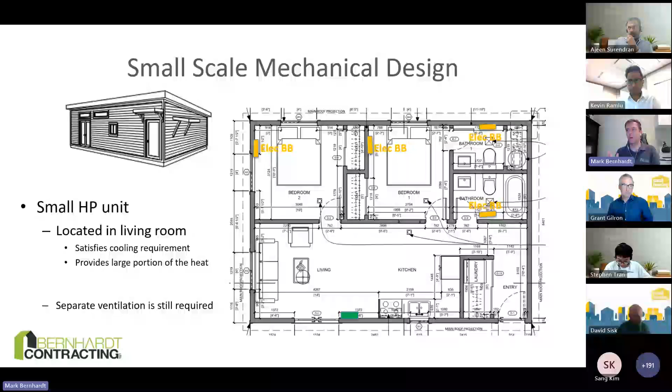What's going on around the province, kind of by date, really ties into what we've been talking about and the trends we're seeing. We're seeing a pretty big shift, or at least the start of a shift, in how we're heating, or at least the fuel use across the province.

If we look at the entire province here, look at the trends - there was a bit of a shift towards more gas over the last 4 years or so. There was a rebate program there we might be able to attribute some of that to as well. Also gas is cheap, and there's a lot of marketing going on. But that is now shifting - gas is no longer the cheapest option.

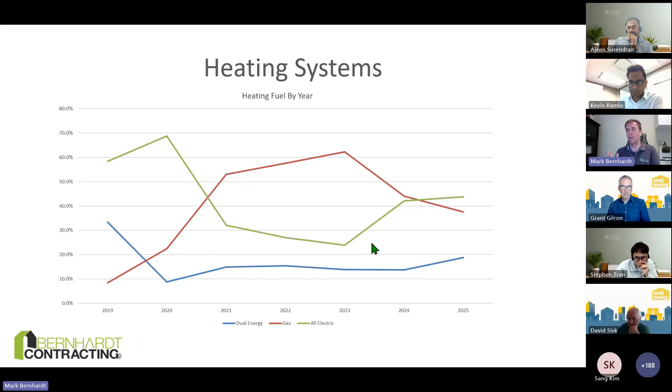We're seeing a lot more smaller units where gas becomes quite a bit more expensive again. And we are seeing more dual energy systems come up here - that's this blue line - but we are seeing a shift back towards more electric systems.

Looking at specific areas, there's some interesting things happening in different places. Greater Vancouver is actually very gas heavy, as is the Fraser Valley. But that's not true of the whole province - Greater Victoria is back to almost 100% all electric again.

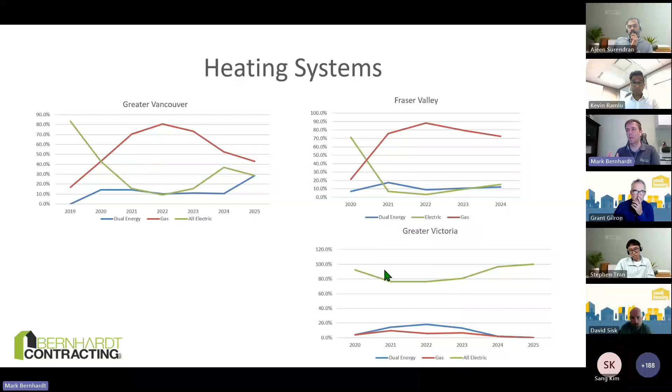And it's interesting - if we look at far north areas like Smithers, only 1 out of the 30 homes in our database built in the last 5 years uses gas as the primary fuel. So it's not related to how cold the location is. We do hear a lot of people saying, oh, we need our gas furnace and we can't fit our gas furnace in our small houses. Well, you don't - there's cheaper options, and it's not about the temperature outside.

It's really about what we have as a sort of tradition in our construction industry. Greater Vancouver and the Fraser Valley have had access to gas for a really long time, so that tradition has built up that that's what you do. The Vancouver Island has only had gas for a couple of decades, maybe three — probably the 90s or into the 80s when it got any sort of real gas. So that tradition hasn't built up.

There are also other places not particularly well known for their good weather, such as Invermere and Dease Lake, that are 100% all-electric buildings, and they're using these smaller, distributed systems more commonly than we are here in the south. I think we can learn something from those northern builders — these options exist, they're good, they've been tested, and they're really good for this smaller scale of housing.

The size of housing actually decreases quite a lot as you go north. Fort St. John houses tend to be a lot smaller than Vancouver houses in particular, or Okanagan houses, where a small house is like 6,000 square feet. So we can take a lot of those lessons from those northern builders and what they're doing and apply them to our southern homes, save a lot of money, get high results on the step code, and do really well going forward.

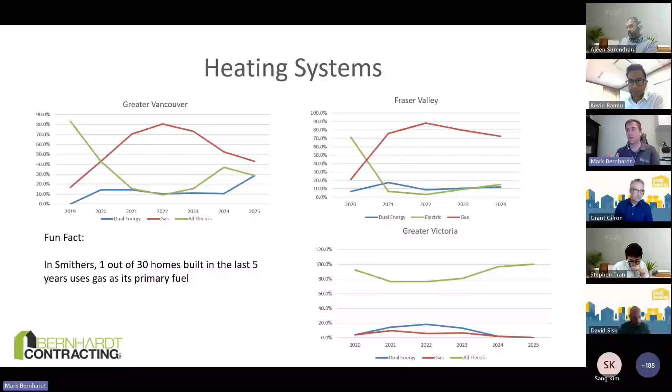Guess it — if it's your hometown, you think your hometown's really good at it. I'll give you a hint: it's not Langley. But I'm interested to know where people think that is, and we could take a look at the questions. I've seen a few of the questions scroll by here, but I didn't get all of them.

Thanks, Mark. And you know, this workshop, this Builder Forum series, I think has had the most chatter, the most discussion in our chat box that we've ever seen in the last five-ish years. So that's awesome, and you're seeing some answers come in here. They're all wrong so far. So that's good, though, but I'm glad people are answering.